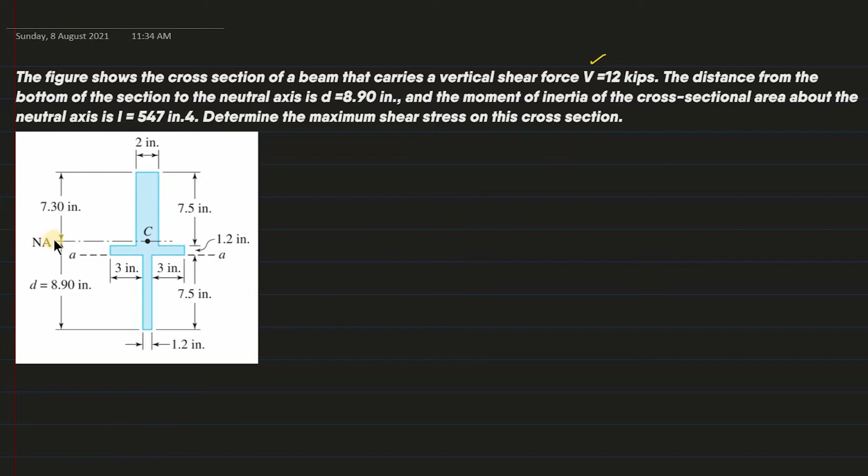Now, the distance from the bottom of the section to the neutral axis, from dito daw to the neutral axis. So, magandang balita yun mga bis, bawas problema yun, kasi given yung location ng ating neutral axis. That's 8.9. Tapos, given na rin yung moment of inertia, and the moment of inertia of the cross-section about the neutral axis is 547 inches to the 4th power.

So, isang malaking biyaya na naman ito, mga bubuyog.

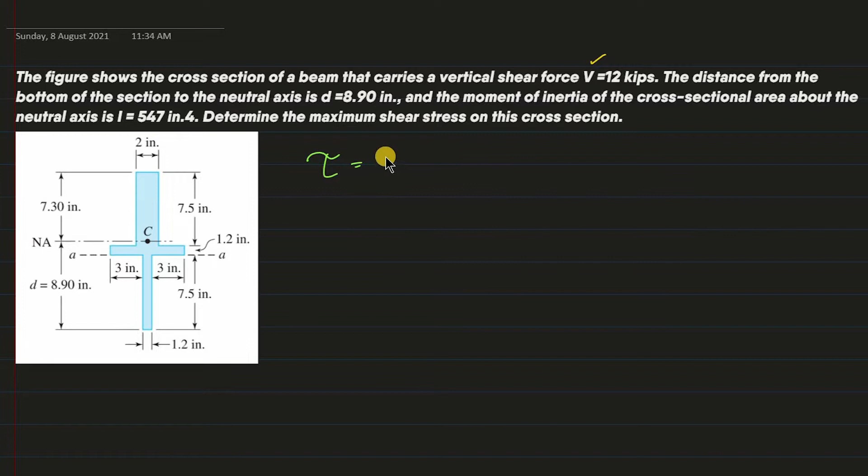Bakit ko nasabi yun? If we try to analyze our formula, shear stress is equal to, ano ulit yun? Nakalimutan ko na. Shear stress is equal to VQ over IB. Itong V tsaka I, they are constant all throughout this cut sections. Pero itong Q and B, nagva-vary yan every portion. Kapag dito yung cut section mo, mag-iiba yung value ng Q or the first area moment, and also B.

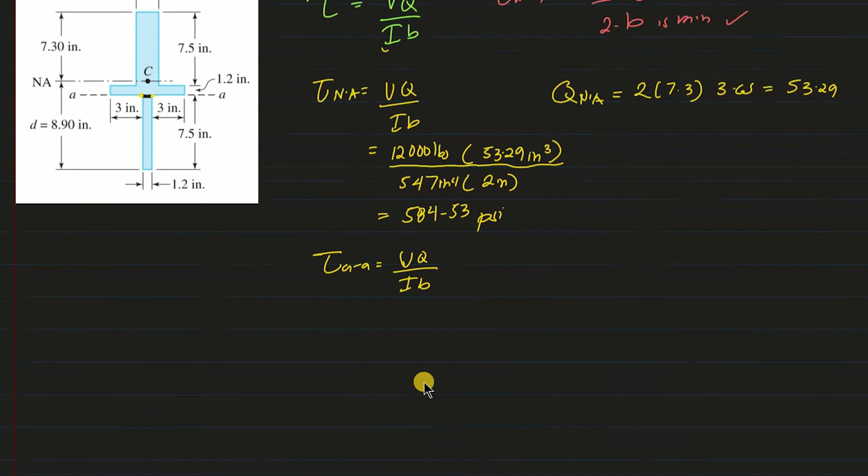Okay, so ano yung value ng ating V? Of course, it's the same cross-section. So, parehas din. 12,000 pounds. However, our Q would be different already. Kasi iba na yung section natin saan natin puputulin. So, QAA would be equal to, first, kunin natin yung area. We can select if we solve for the first area moment sa top or bottom. But for me, I will choose the bottom. Mas madali, di ba? Isang rectangle lang yan.

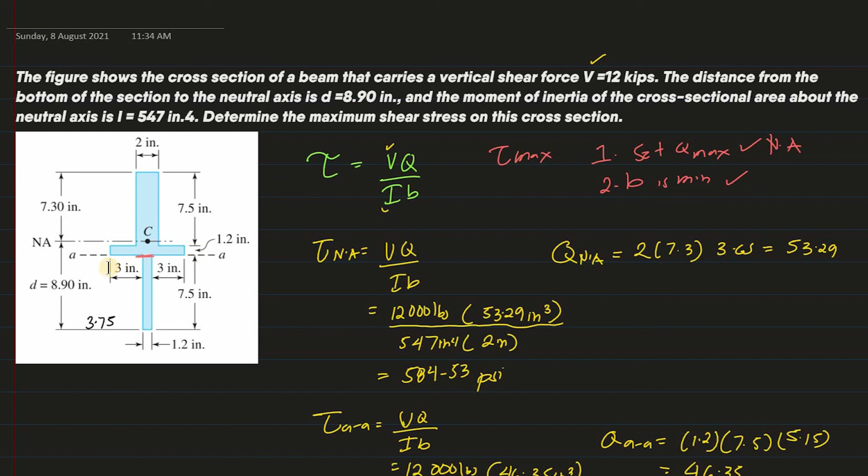If you're solving for the maximum shear stress, first is to take a look at our cross-section. Kapag hindi uniform yung ating cross-section, lumalapad, lumiliit, there's a tendency na hindi sa neutral axis yung location ng ating maximum shear stress. You still need to consider these two setups. First is the setup kung saan maximum yung Q, at the neutral axis. And second is kung saan minimum yung B, yung pinakamanipis na part. And since manipis naman lahat ng part, piliin nyo doon sa junction kung saan sila pinag-connect.